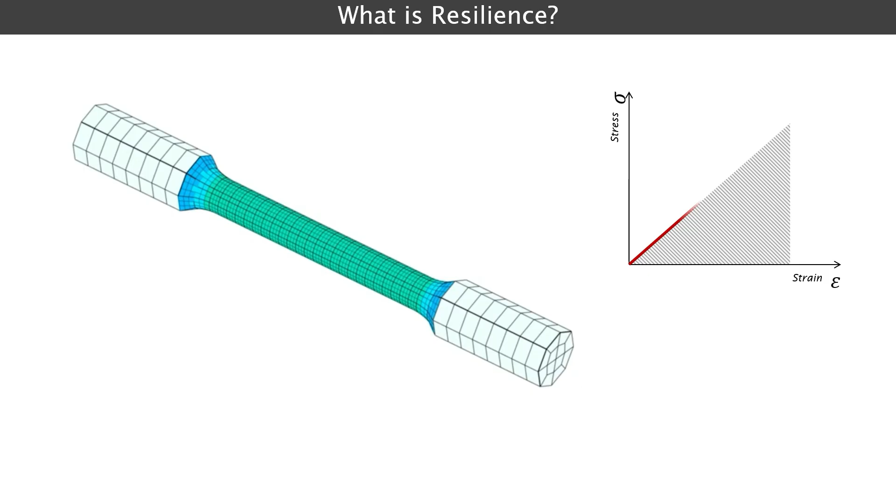Since the material is within the elastic range, it has the capacity to return to its original state once the stress is removed. Resilience, therefore, is the ability of a material to absorb and store energy when it is elastically deformed, releasing it upon removal of the load without undergoing permanent deformation.

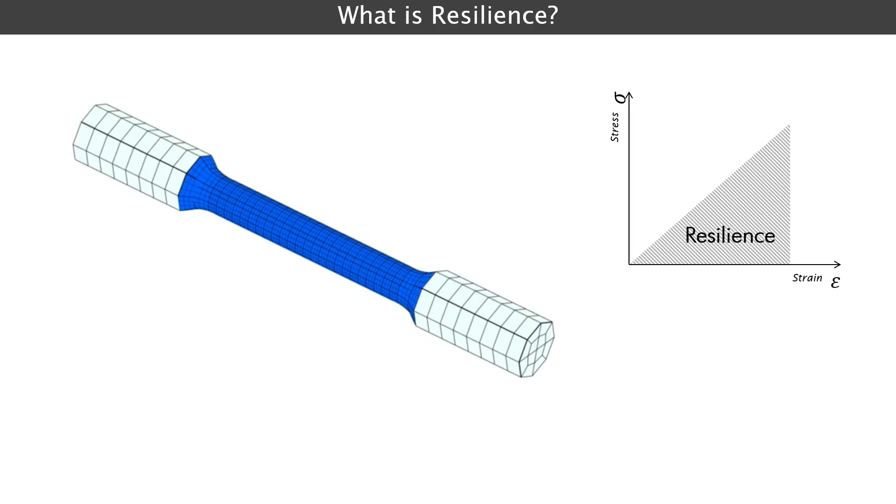With the original definition in mind, let us now consider the resilience of infrastructure systems. Measuring infrastructure resilience to natural hazard events is not an easy task. It may be accomplished through two main approaches. In the first approach, resilience is quantified through attributes or properties of the infrastructure systems that are known to be related or beneficial to resilience. For example, attributes like robustness, resourcefulness, adaptivity, recoverability, among others.

The application of these types of methods requires a definition of a system of indicators that reflects the attributes and the extent they are present in an infrastructure system. In the second approach, a performance curve serves as the main metric of resilience, informing on the ability of a system to absorb impact from an external disturbance and to respond and restore performance in an efficient and timely manner.

In the pre-event state, the system functions as expected, having a predefined performance level that responds to demand and offer conditions. Once a disturbance occurs, like this earthquake for example, the performance drops abruptly to a remnant amount that depends mainly on the system capacity to absorb. Physical vulnerability strongly modulates this capacity.

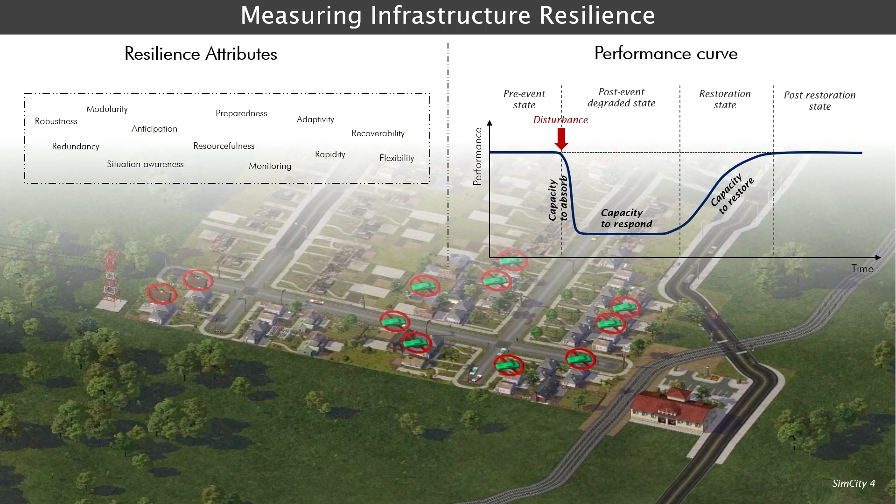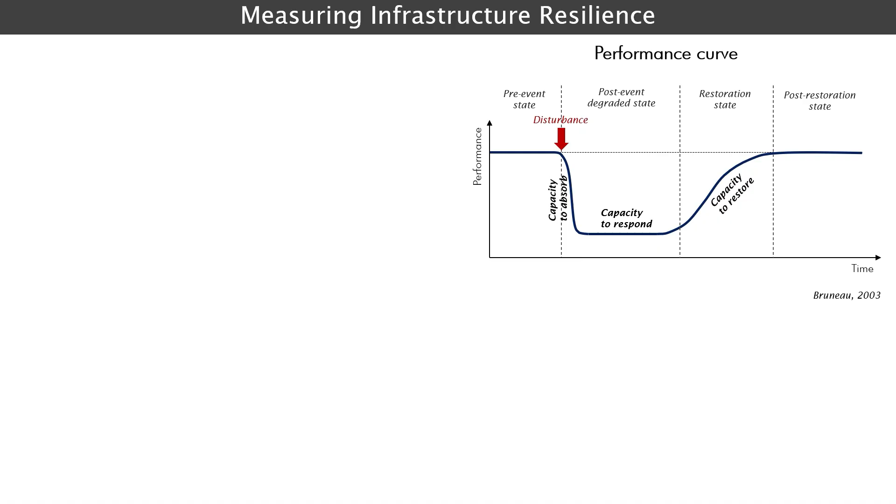The performance curve, originally proposed by Michel Bruneau in 2003, is sufficiently general to represent the performance of any type of infrastructure system, such as electric power, water and sanitation, transportation, hospital infrastructure, and even residential infrastructure, among others.

The performance measures the capacity of the system under study to provide the service for which it was built. Appropriate performance implies that the system operates under adequate conditions relative to the demand placed on the service it delivers. This means that performance curves are the most general model for measuring impacts on elements of the built environment.

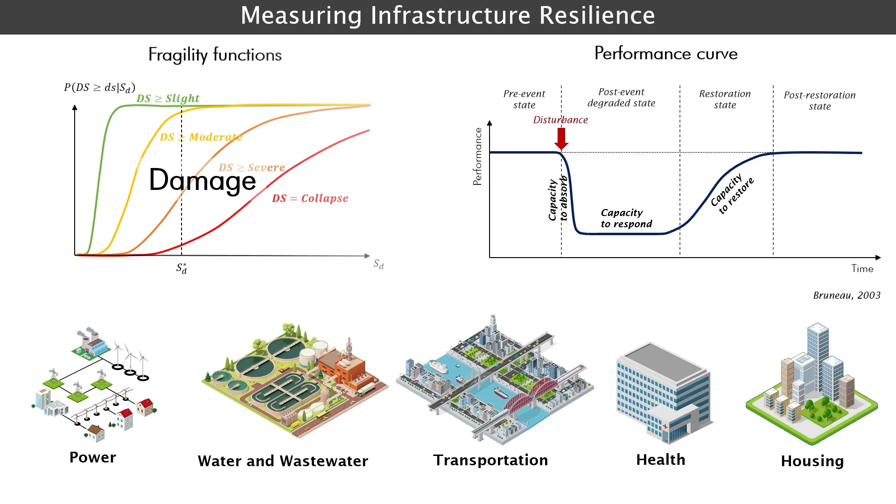In probabilistic risk modeling, it is common to describe damage in infrastructure elements through fragility curves. These make it possible to associate a probability with different damage states of an element as a function of hazard intensity. An additional level of complexity is reached when characterizing the exposed elements through vulnerability functions, which provide information not about damage itself, but about economic loss relative to a replacement value estimated for the exposed elements. Catastrophe risk models usually quantify risk in terms of direct loss.

However, performance curves encompass a broader meaning, as they involve information related to both damage and loss, which are reflected in the drop in the performance following the occurrence of a disturbance, as well as in the operational and governance conditions of the system that provide it with the capacity to respond to the event and restore what has been lost.

The area above the performance curve is an indicator of the system's set of capacities, and therefore of how easily it returns to the expected level of performance. This area is thus a resilience metric. In fact, it reflects the lack of resilience of the system.

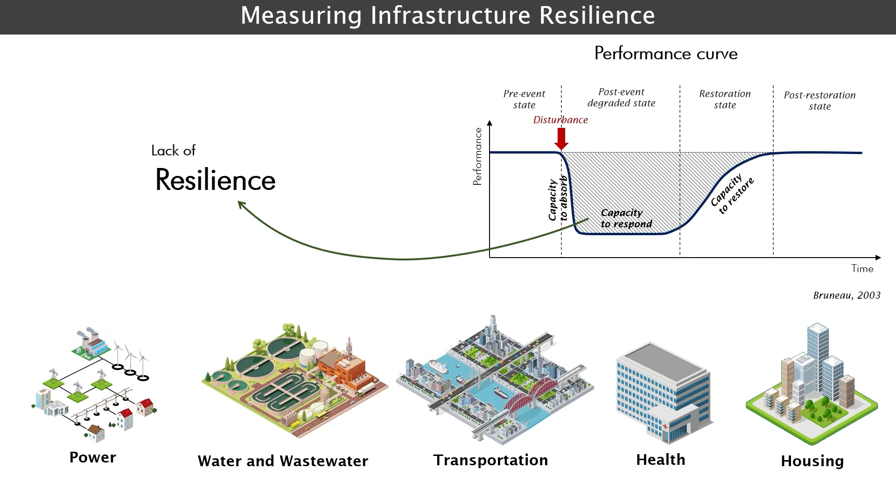Therefore, a system with greater capacities to absorb, respond, or recover exhibits a smaller area above the performance curve. In this way, it becomes possible to measure the resilience of infrastructure systems with different capacities, as well as the potential benefit of implementing risk management actions to enhance the resilience of those systems.

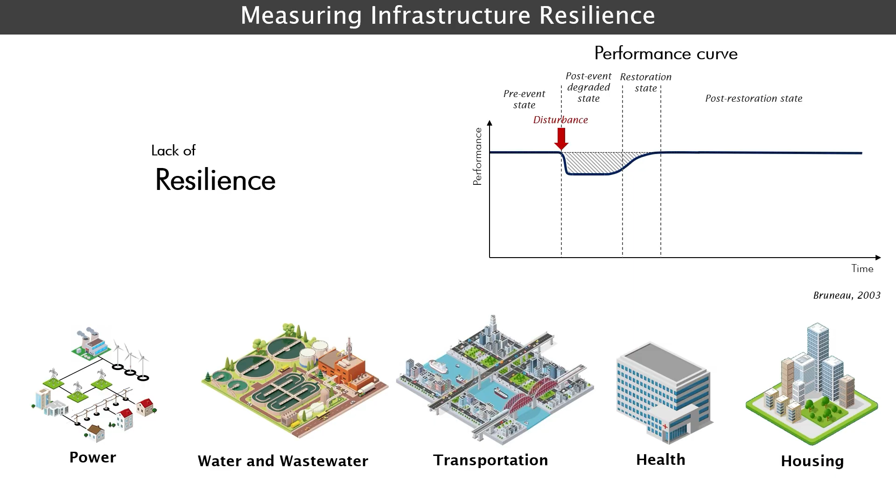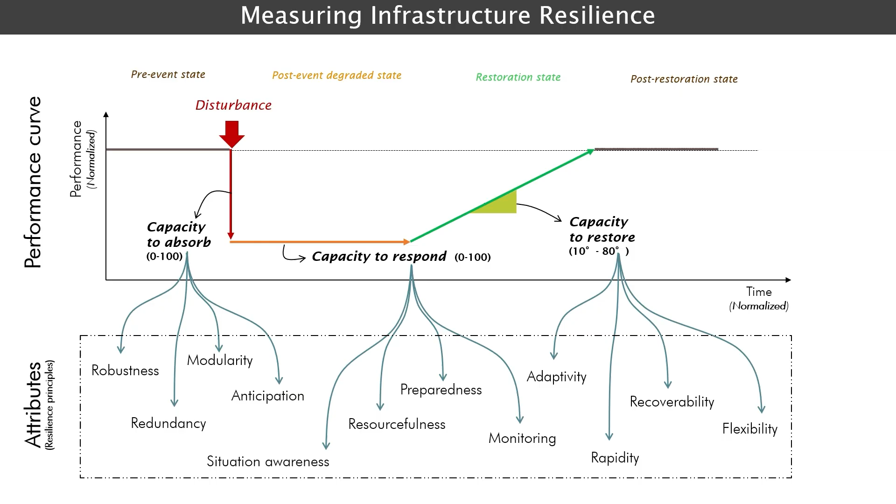Then we take advantage of the relation between the resilience capacities and attributes, defining the one-to-many relationships illustrated. These attributes are accounted for through a system of indicators carefully selected to reflect on the corresponding attributes that are used to quantify the corresponding capacity indices, making it possible to approach a measurement for resilience from a set of indicators available for most countries and territories in the world that are transformed into commensurable variables through the use of membership functions, and then weighed and added to make the index of each capacity.

GIRI is calculated as the complement of a normalized relation between the area and the perimeter of the shape of this simplified and attribute-based performance curve.

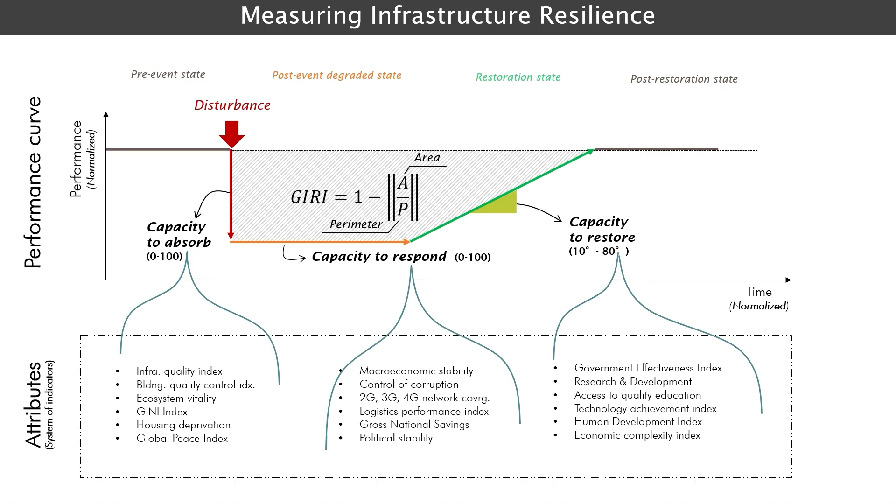Now, the only remaining element to assess is the disturbance, that has an effect on the size of the drop from the pre-event state. This disturbance is unspecific, meaning that it is impossible to know its size, characteristics, and origin beforehand. Or, in other words, it may come from any hazard at any moment. We define this disturbance as a random loss of random occurrence. This implies that the disturbance must be quantified through probabilistic risk assessment using a CAT risk model.

The CAT risk modeling approach used for GIRI is depicted in this slide. It has three components: hazard, interpreted as a set of events that are mutually exclusive and collectively exhaustive, covering all the possibilities in which hazard may manifest in a territory. Hydrometeorological hazards are modified by climate change. The exposure, which is the collection of elements and components of the infrastructure systems, and the replacement value, and the vulnerability, which relates hazard intensity to cost of damage for each individual element.

Their appropriate combination using a CAT risk modeling framework returns financial metrics such as the average annual loss, the PML curve, but more importantly, the loss exceedance curve, that speaks about the probability distribution of the loss in the infrastructure of a country, going from low loss events of high probability to high loss events of low probability.

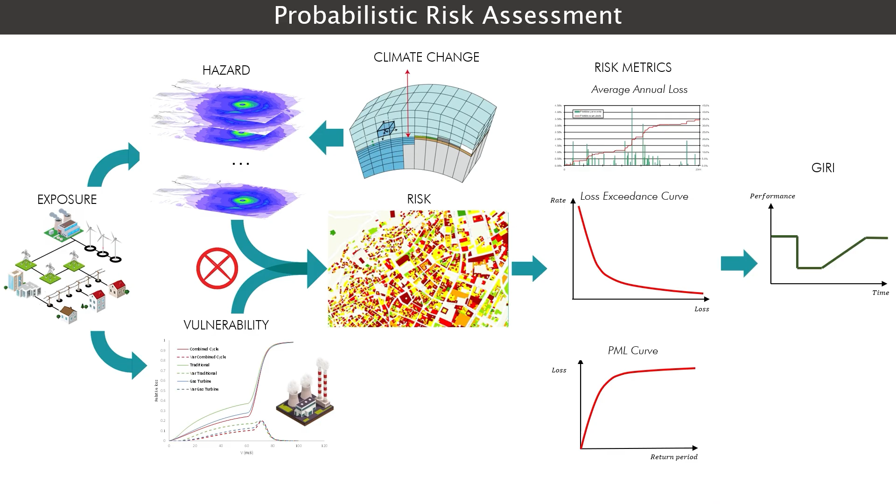The loss exceedance curve speaks about the rate, that is a measure of frequency, probability, or likelihood of loss amounts, being loss itself a measure of impact, of the size of the consequences. This curve covers the full spectrum of events affecting the infrastructure of a country. Very common events with relatively lower losses, like landslides or floods, are more relevant to the first portion of the curve. Intermediate impact events of lower probability, like droughts or tropical cyclones, are represented in the central portion of the curve, while high impact events of very low probability, like tsunami or earthquakes, influence the curve in the last portion.

The way the events occur in time and the impact caused, like in this example for different hazards, holds the rate and loss relationship expressed by the loss exceedance curve. The realization shown may even be different, because this metric is not a predictive tool, which implies that within the loss exceedance curve exist all the possibilities or combinations of event occurrence and consequences to the infrastructure. In other words, the loss exceedance curve fully represents a random loss of random occurrence, which is precisely what is needed for GIRI. Other relevant metrics can be extracted from the loss exceedance curve.

For example, if we aggregate the losses over time, the average rate of increment of the accumulated loss is the average annual loss. That is a very important and robust metric of risk. In a nutshell, the average annual loss represents the amount that needs to be paid annually to cover, in the long term, all the losses derived from the occurrence of natural hazard events affecting the infrastructure of a country. In actuarial terms, it is very similar to the pure risk premium of an insurance instrument.

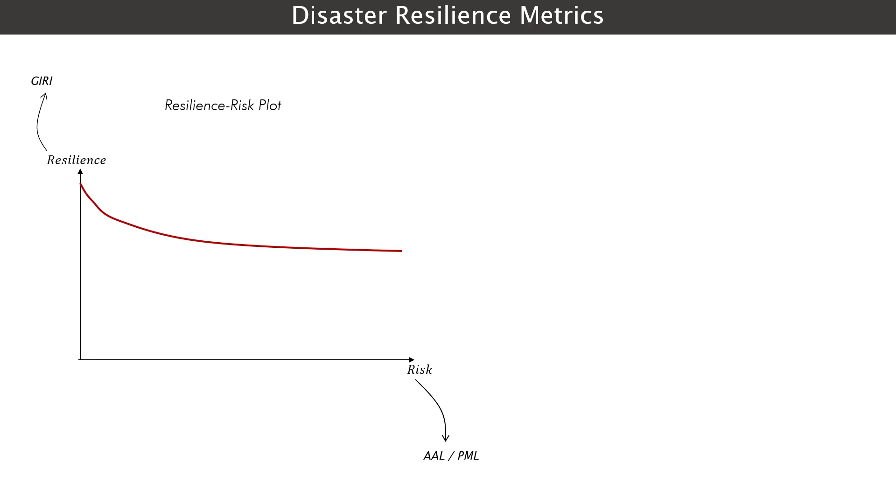Finally, we found that the derivative of the resilience risk plot is the performance curve, more precisely the shape of the performance curve. This shape is very important to inform on the current level of resilience, but also to design risk management and adaptation plans to achieve a resilience target.

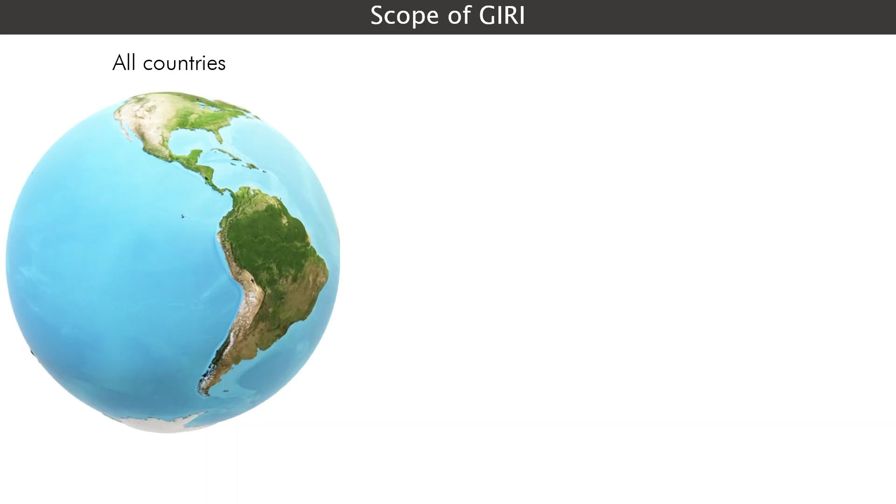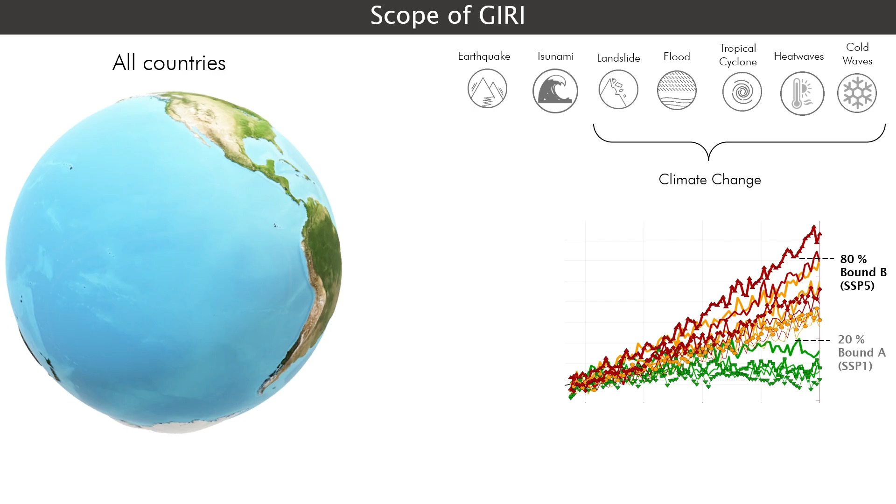GIRI is quantified for all countries in the world. It covers risk and resilience assessment to multiple hazards, including earthquake, tsunami, landslide, flood, tropical cyclone, heat waves, and cold waves. The last five with models that explicitly incorporate climate change through the definition of upper and lower bounds of climate variation, in accordance with the most recent IPCC future projections.

The infrastructure sectors included are power, highways and railways, transportation, water, wastewater and irrigation, communications, oil and gas, and buildings. Each sector is represented in the model through the full collection of assets and elements, country by country, with novel pricing and physical vulnerability models.

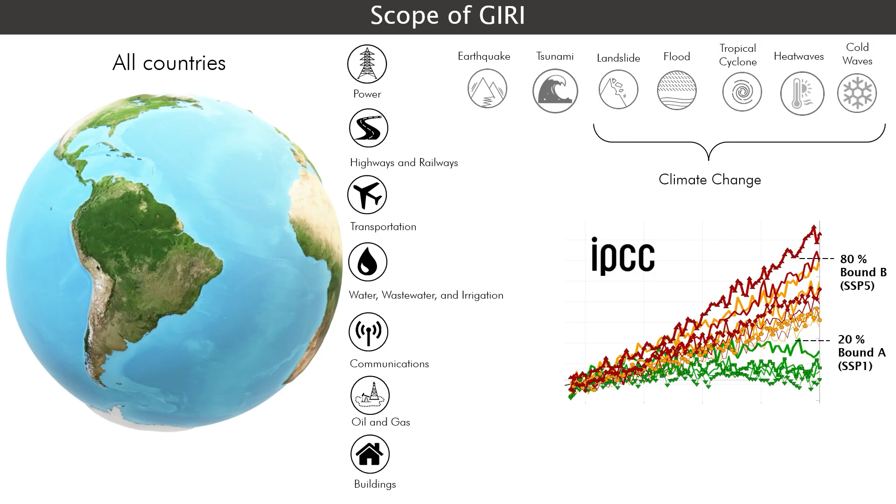All hazard models are global, covering the whole planet, and event-based, built up by many individual events that, in conjunction, define all the ways each hazard may manifest in the territory. Nonetheless, it is simpler to show these integrated uniform hazard maps for illustration.

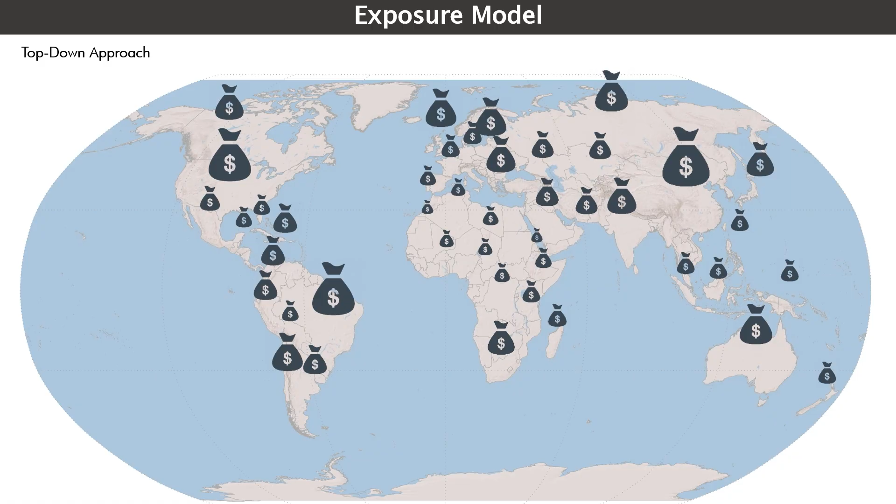The total economic value of the infrastructure of each country, illustrated here as bags of money, is approximated as a fraction of the produced capital within the total country wealth. It is important to approximate this amount to then distribute it over the individual components of all sectors and subsectors of infrastructure that have unique characteristics and geographical locations. This approach allowed us to exploit the most of all available geospatial data of infrastructure while constraining it to the macroeconomic capital stock for each country.

Furthermore, GIRI incorporates state-of-the-art vulnerability models for duration-sensitive events, such as heat waves and cold waves. These are implemented through vulnerability functions indexed to bidimensional intensity measures, thereby capturing the complexity inherent in both the manifestation of the event and the duration of extreme conditions. With over 50 different archetypes defined for this assignment, the GIRI library of vulnerability functions is, at present, the most complete resource on vulnerability models for cat risk assessment of infrastructure systems.

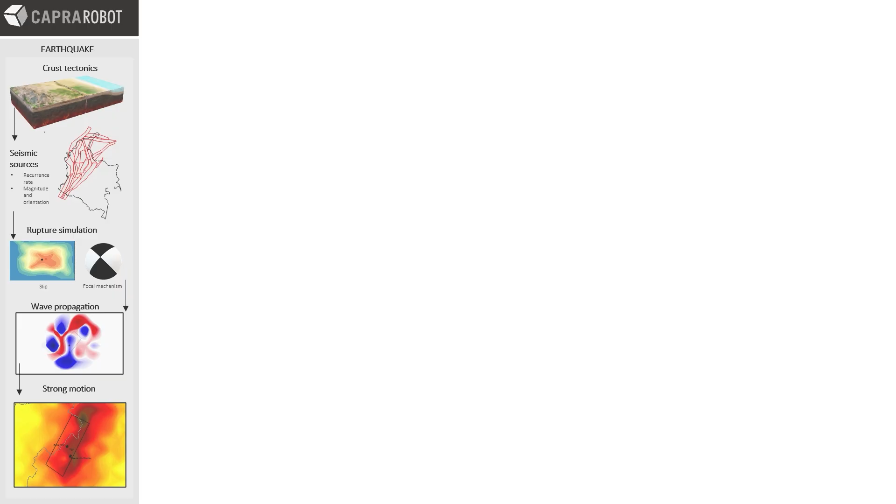All risk models are created using Capra Robot, which is INGENIAR's disaster risk assessment engine and probably the most complete cat risk modeling suite available nowadays, in terms of its coverage of perils and exposure sectors. Capra Robot incorporates state-of-the-art physics-based models for multiple perils. On the geological side, these include earthquakes, tsunamis, and volcanic eruptions. On the hydrometeorological side, they encompass droughts, floods, wildfires, pandemics, cold waves, heat waves, tropical cyclones, convective storms, and landslides, all of which modeled through the implementation of a stochastic weather generation framework, within which climate change projections can be integrated and downscaled into meteorological forcing variables.

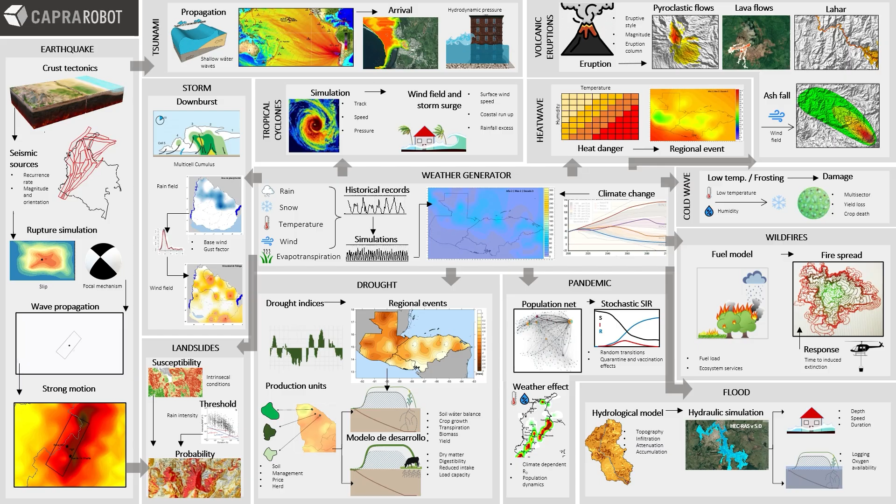Capra Robot covers risk models for a wide variety of sectors and perils beyond the current scope of the GIRI model. However, this provides GIRI with an unprecedented potential for scope expansion, through Capra Robot's capability to express risk from any combination of peril and sector in terms of probabilistic cat risk metrics and performance curves.

The amount of results included so far in GIRI is huge. We are covering 8 sectors, subdivided in a total of 26 subsectors, and 7 hazards, some of which have variations due to climate change. The overall matrix of possibilities is very large. However, not all cells in this matrix are included in the model. For earthquakes, tsunami, tropical cyclones, floods, heat waves, and cold waves, including the effect of climate change, all the combinations are covered, as shown by the squares in each cell.

For landslides, both earthquake and rain-triggered, the assessment is only performed on the roads and railway tracks of the world, where it makes more sense. The match between landslides and other infrastructure sectors is not as well represented in this model due to scale constraints. Green and blue squares indicate results from the first and second iterations of GIRI, respectively.

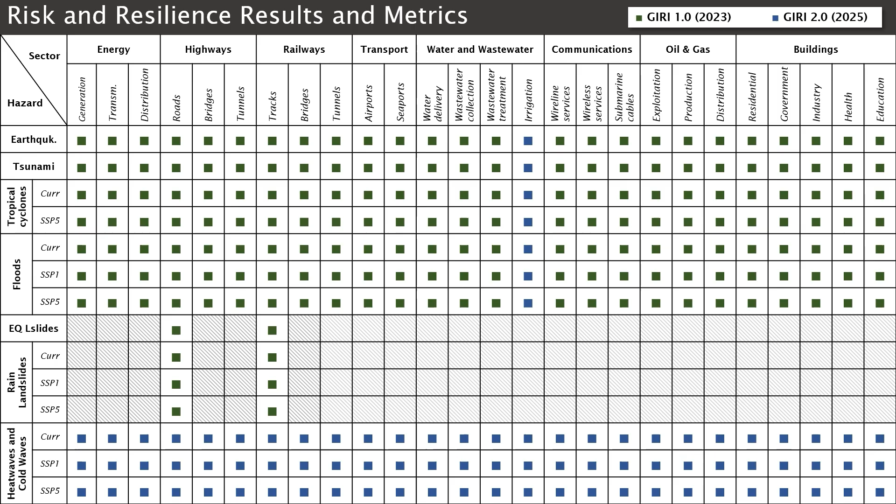Inside each cell, we will find a full set of risk and resilience metrics, including the loss exceedance curve, the PML curve, the average annual loss, and the GIRI, with the disaggregation of all the indicators that make up the resilience capacities. Each cell is a vast source of information on disaster risk and resilience for a sector and hazard combination.

What is illustrated here is the set of results for one country, meaning that similar results are calculated for all countries in the world. At present, there is no other catastrophe risk modeling effort as prolific, versatile, and robust as the model for GIRI. With such an amount of fit-for-purpose metrics, the full spectrum of applications of GIRI is still being discovered.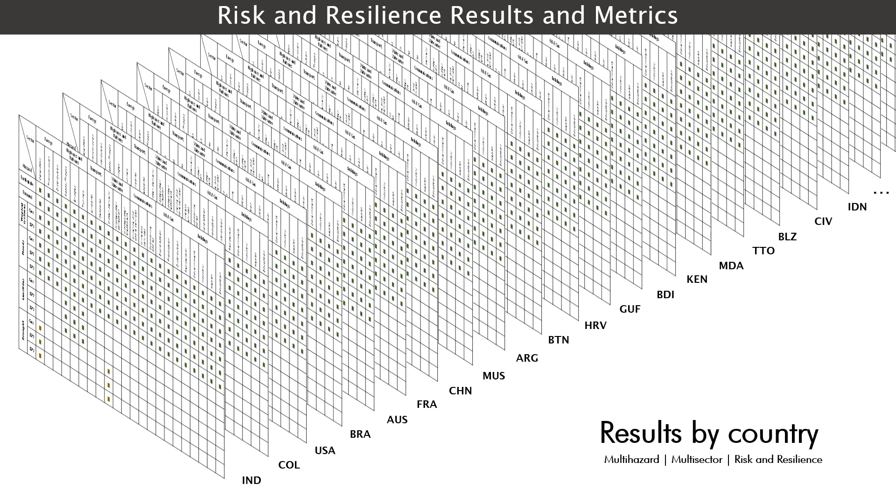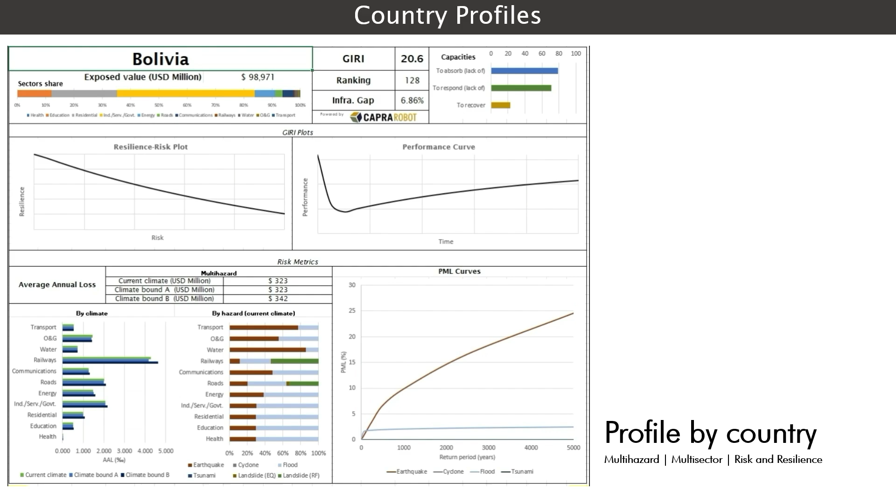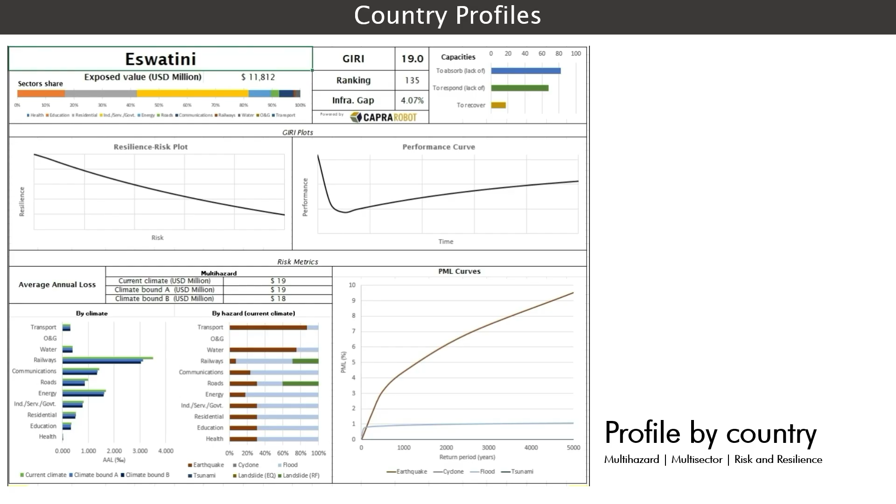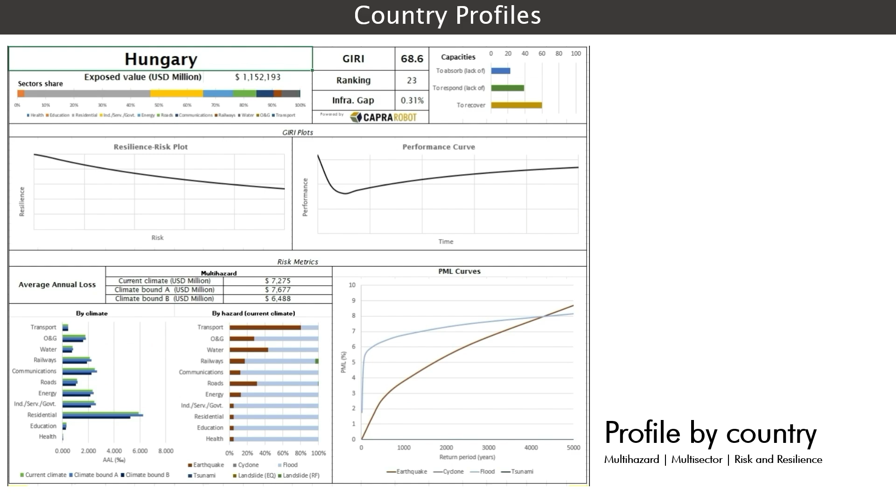For example, some uses of these results include a risk profile by country, very helpful for governments to understand their fiscal risk for all infrastructure sectors and be able to inform and develop national resilience policies or strategies. GIRI provides a holistic view for the risk profile, with a solid foundation in probabilistic CAT risk metrics, but transcending their actuarial and financial nature into a metric of infrastructure resilience and its individual capacities, useful for governments to diversify investment in risk management and climate change adaptation, referring to construction, operation, maintenance, and repair among gray, green, and blue infrastructure, but also investments on the social, environmental, and economical transformations required to increase resilience.

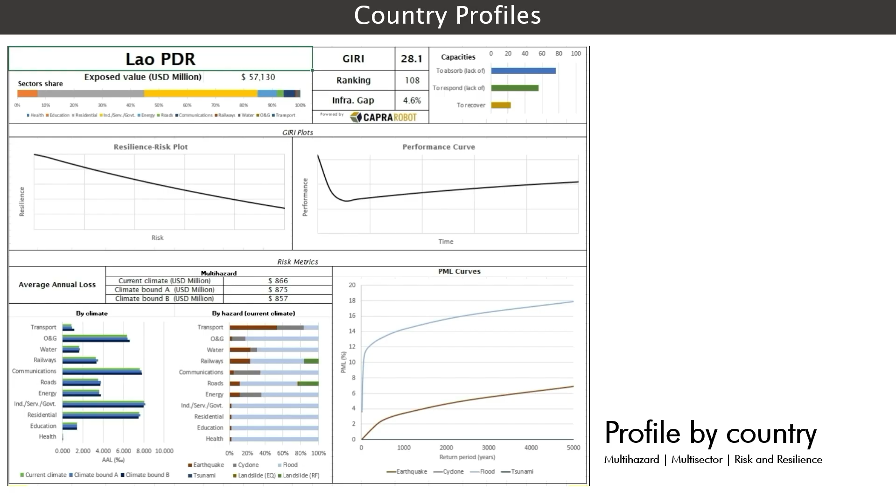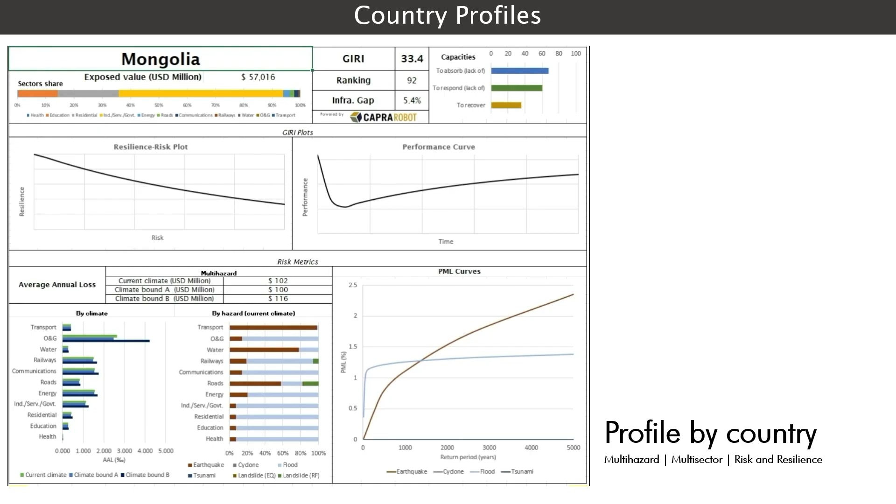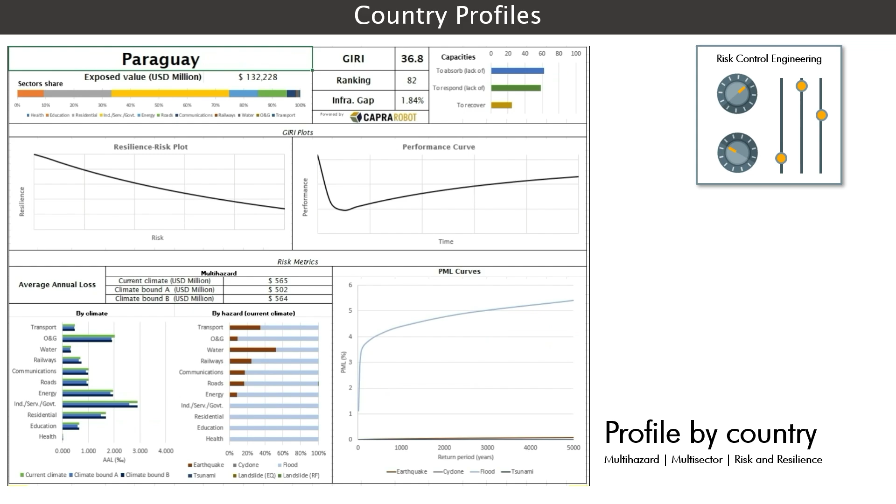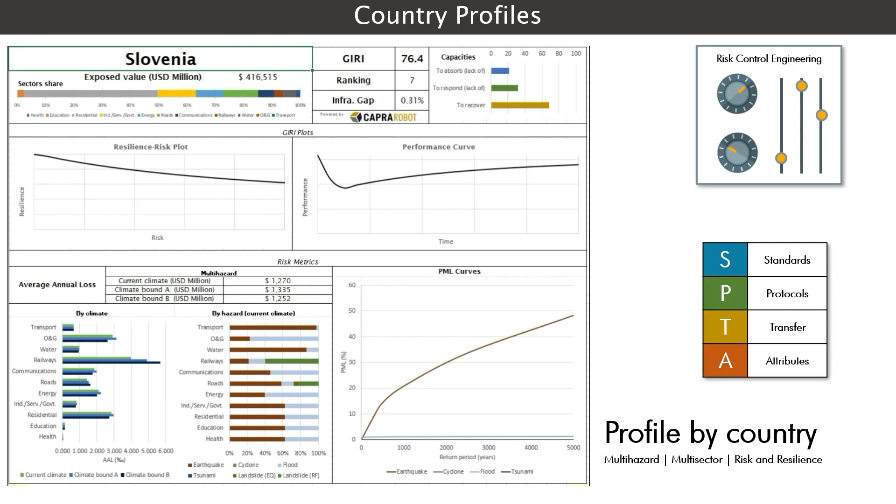The GIRI risk model is versatile enough to allow for the verification of pertinence and effectiveness of risk management and climate change adaptation actions and plans. Using risk control engineering, it is possible to fine-tune a collection of risk management and climate change adaptation actions to achieve a target resilience level. Actions like design, construction, and land use standards, response, recovery, and adaptation protocols, financial risk transfer schemes like insurance, CAT bonds, issue of contingent debt, among others, or interventions oriented by resilience attributes and principles.

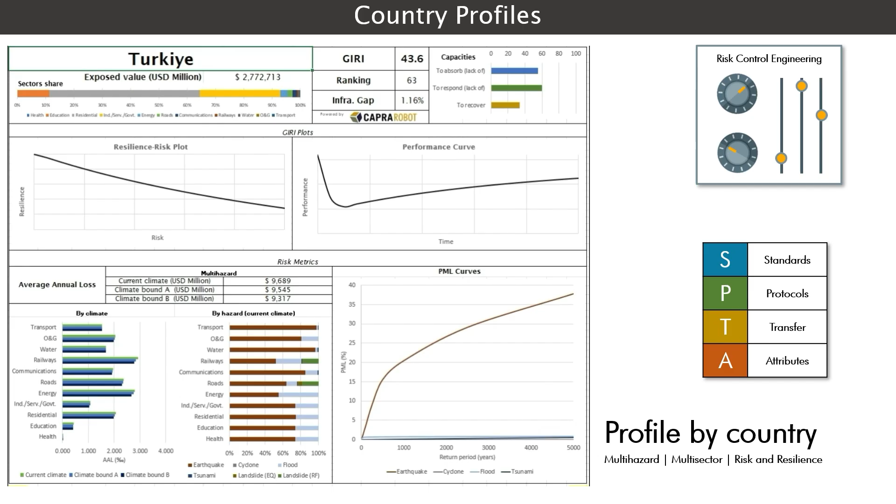With such tools, governments can have an evidence base for the development of resilience standards in each sector. This is, in other words, to evaluate the effectiveness of different risk reduction measures to make decisions about the optimal level of resilience.

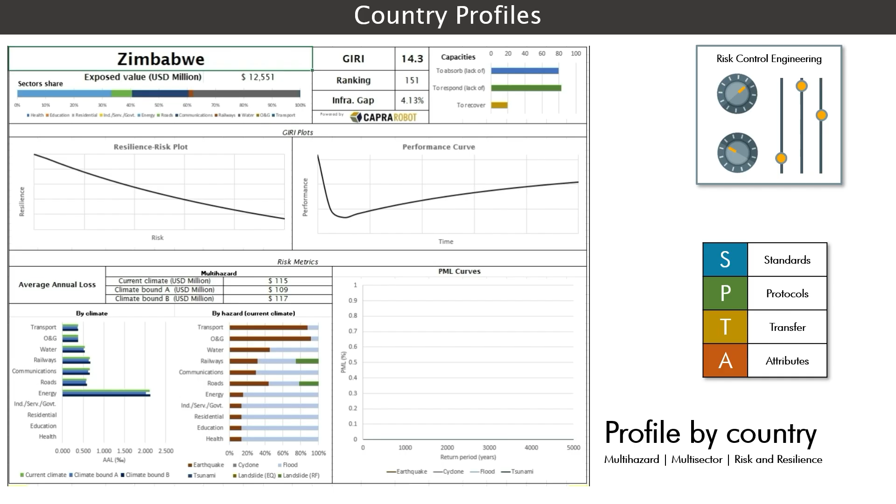GIRI currently incorporates infrastructure projecting, focused on the projection of future infrastructure growth, investment requirements, and disaster risk evolution. It integrates demographic trends, infrastructure patterns, and vulnerability assumptions to estimate how infrastructure exposure and associated losses may change under different development pathways, including business as usual conditions, resilience oriented trajectories, and scenarios consistent with achieving the Sustainable Development Goals by 2030. Therefore, GIRI delivers metrics for all projected cases, making a strong case for resilience-oriented development of infrastructure as an effective strategy for risk reduction.

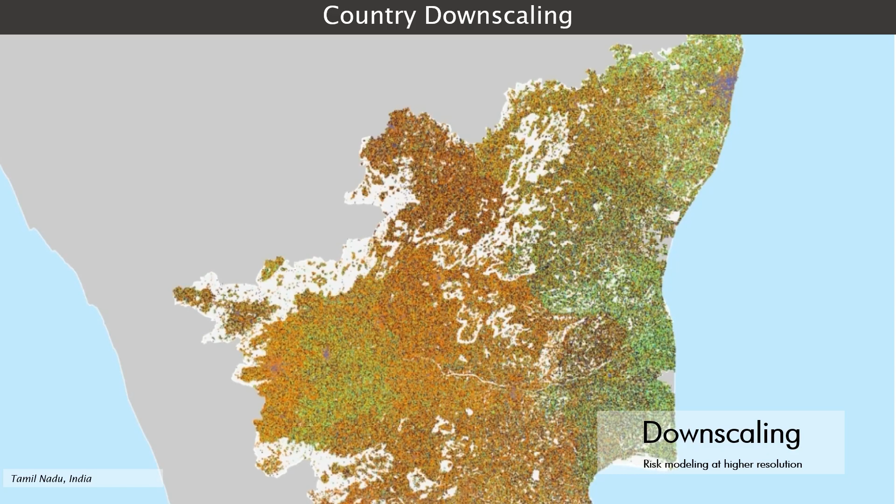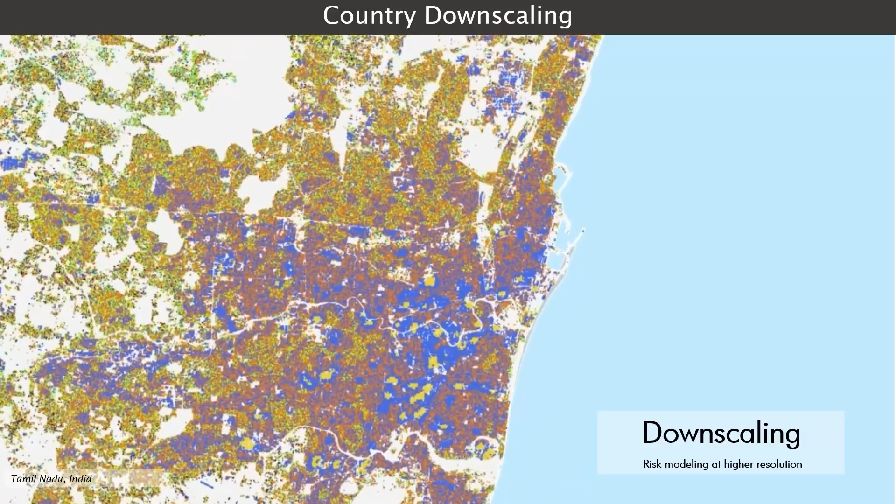Furthermore, GIRI has already implemented downscaled models for some territories, where infrastructure risk is modeled at the highest possible resolution. So far, the GIRI downscaled models include Chile, Fiji, Nepal, Mauritius, and 4 Indian states, where risk metrics are obtained even at a building-by-building resolution.

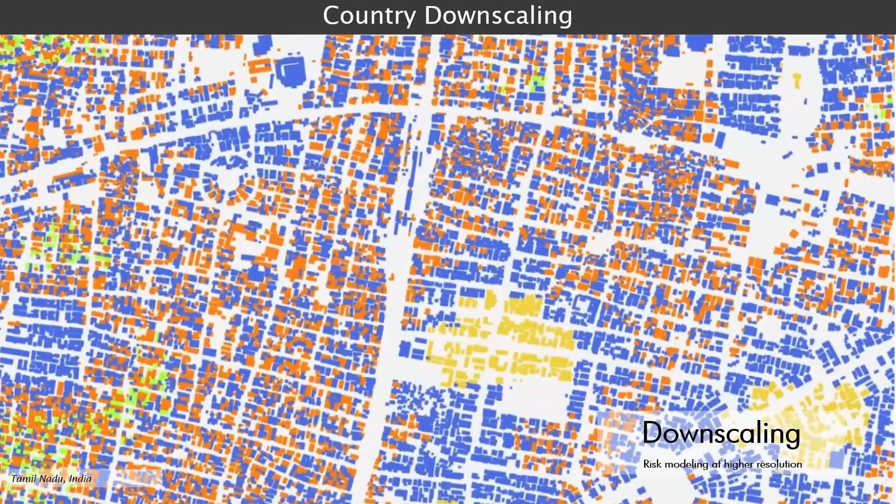GIRI is a cross-cutting model and index that provides robust results and metrics, useful to inform, design, and monitor public policy in all aspects of development. It takes into consideration disaster and climate risk as a byproduct of the existence of exposure and vulnerability conditions in the infrastructure systems, over territories in which the occurrence of hazard events is natural. Climate change is explicitly incorporated in GIRI, modifying the conditions of occurrence of natural hazards and the risk landscape, but in a way that is deeply uncertain. This justifies the use of probabilistic approaches to account for risk and resilience.

Due to its probabilistic and holistic nature, GIRI highlights the physical and intangible risk and vulnerability drivers, thus enabling the identification of corrective and prospective interventions to be done. Furthermore, the architecture of GIRI allows it to incorporate risk management and adaptation actions within the model, providing robust evidence and data on effectiveness for decision making. And this is the same architecture that allows GIRI to evolve and expand. GIRI can support risk quantifications for other sectors and systems not included in this iteration, such as agriculture and ecosystems, which can be understood nowadays as critical infrastructure.

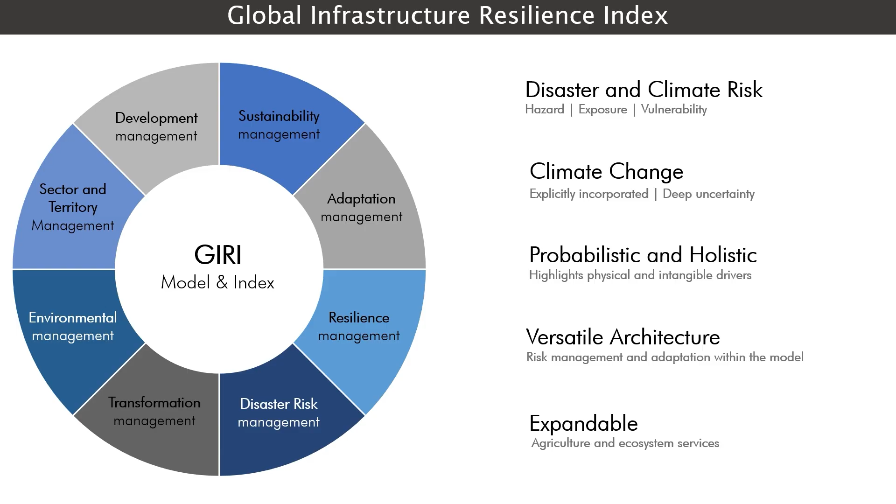Measuring is essential for decision making. What is not quantified cannot be managed. Risk assessment is crucial for revealing and understanding risk and for holding decision makers accountable. Disaster risk represents a contingent liability and thus a sovereign risk for society. Risk reduction, prevention, and resilience-based design are duties in risk governance and the nation's accountability. Tracking DRM progress over time requires evaluating the trade-offs involved in development transformations. Building resilience is building a future, strong, adaptive, and full of potential. Resilience-based, it's protection with returns.

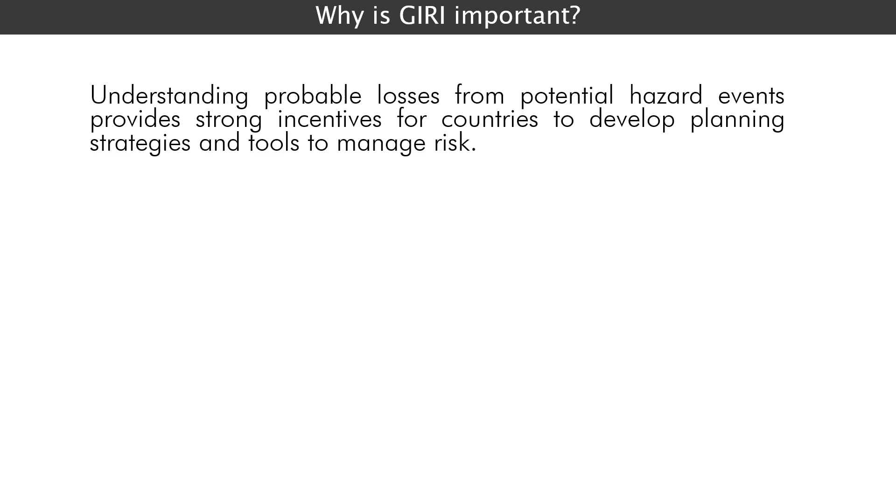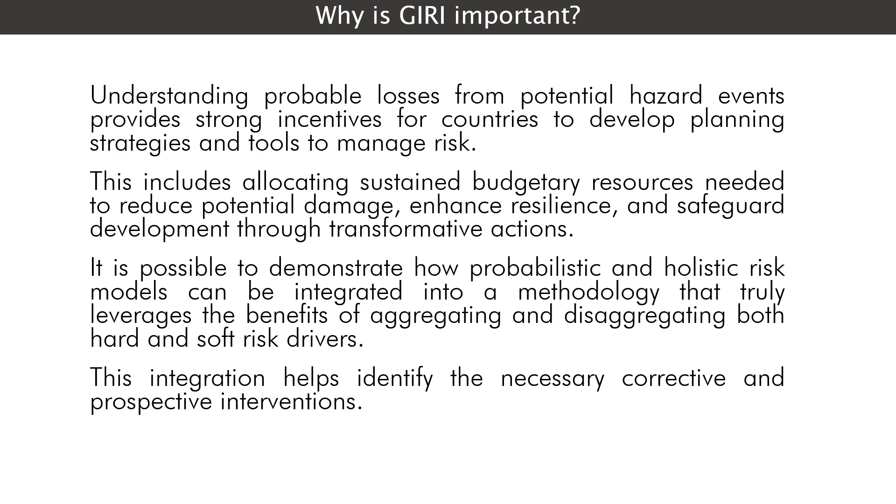Understanding probable losses from potential hazard events provides a strong incentive for countries to develop planning strategies and tools to manage risk. This includes allocating sustained budgetary resources needed to reduce potential damage, enhance resilience, and safeguard development through transformative actions. It is possible to demonstrate how probabilistic and holistic risk models can be integrated into a methodology that truly leverages the benefits of aggregating and disaggregating both hard and soft risk drivers. This integration helps identify the necessary corrective and prospective interventions.

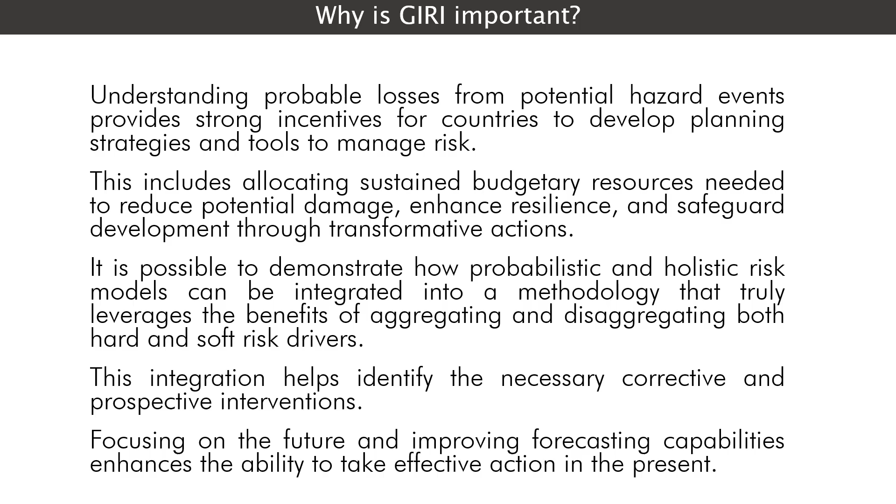Focusing on the future and improving forecasting capabilities enhances the ability to take effective action in the present. This is the Global Infrastructure Risk Model and Resilience Index. Thank you. And remember, if you're not profiting from resilience, you're already paying for vulnerability.